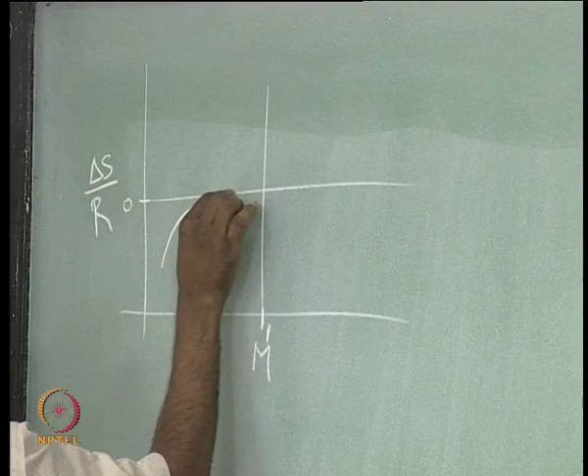We had a plot that was looking like this, that is, for Mach number less than 1 we were having delta S by R that was slightly negative or more negative depending on very low Mach numbers. For very high Mach numbers more than 1 we are going to have delta S positive.

Because of this reason we are going to say only M1 greater than 1 going to M2 less than 1, that is the only solution that is possible, which corresponds to my gas getting compressed across the shock. So we are saying only compression shock is possible, that is what we said.

And I was also very careful in telling you that when we say only compression shock is possible, I included the statement that it is for our air. Okay, if I want to think about it, I am currently going beyond the course curriculum, I am just telling you, if you are interested you can go read up more.

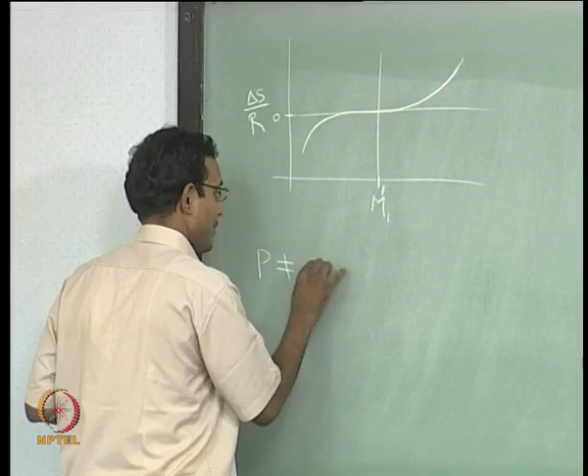If we are in a gas which does not obey P equal to rho RT, this is what we have been using all this time. We said P equal to rho RT for our gas, and so we got this behavior.

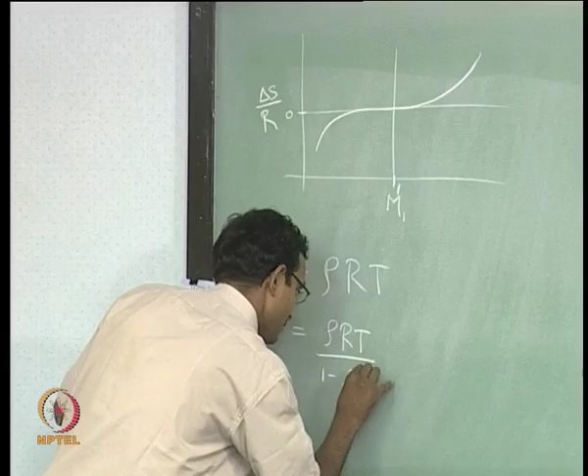Okay, if there is a gas where this is not true, say if I take the van der Waals equation, which is also known to people already, so I am using that. An equation of this form where A and B are two constants for that particular gas, for that range of pressures and temperatures which we are interested in. This is going to be the equation for such gases, where if I say A and B are 0, it becomes P equal to rho RT.

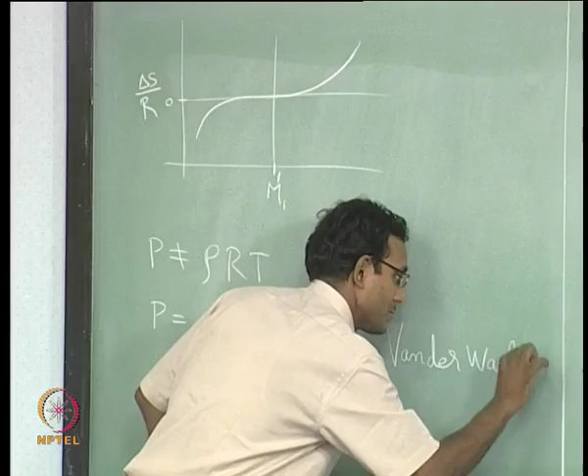Okay, if there is a gas that is obeying this, then we can call it either the van der Waals gas, or they gave a better name for it. People who studied this, based on them, get a name - it is called the BZT gas.

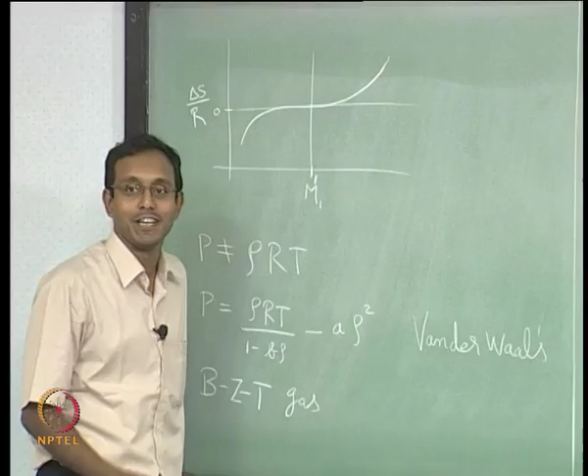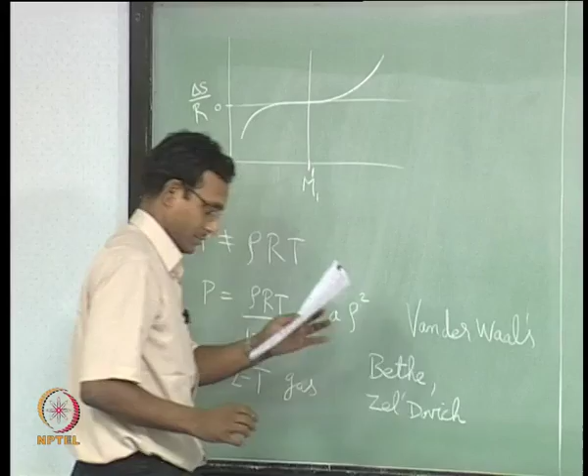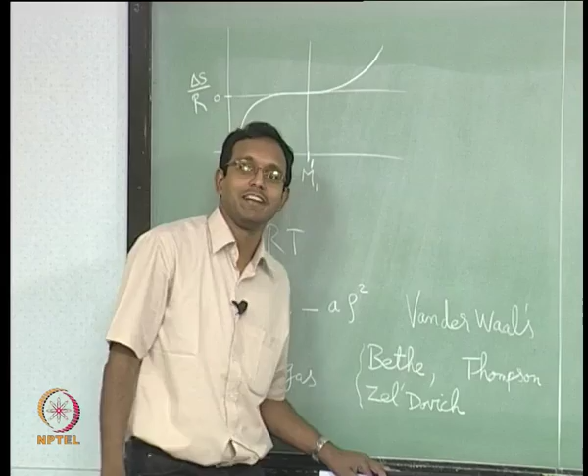BZT flows is what they call flows with this kind of gas. It is named for 3 different people: Bethe, Zeldovich - I think there is an apostrophe somewhere, yeah - and the third guy is Thompson. I will write Thompson here. These people worked in the 1940s, and he worked in the 60s and 70s, and they studied flows where expansion shocks are probably possible.

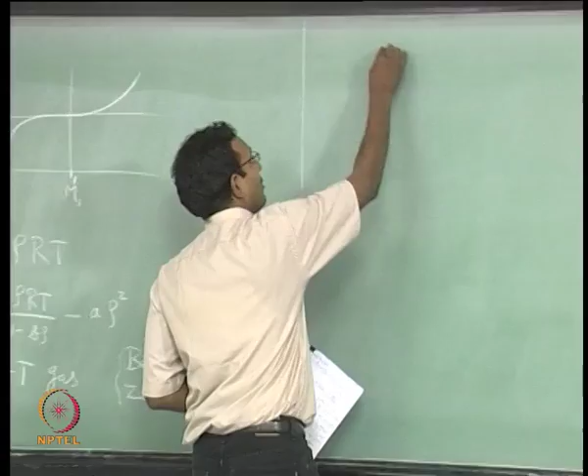Okay, the way it works is like this. I will go to a plot here of our state diagram. I am going to use P and V, and for our common gas it is going to look like this for T equal to constant line.

But if my pressures and temperatures are very low, where van der Waals forces are important, or my gas is such that it is important, the curve may look like this. If you are very close to, say, condensation of water vapor kind of ranges, things may change and do crazy things like this. I am not sure whether air with this little percentage of water vapor will affect it, I do not think it does.

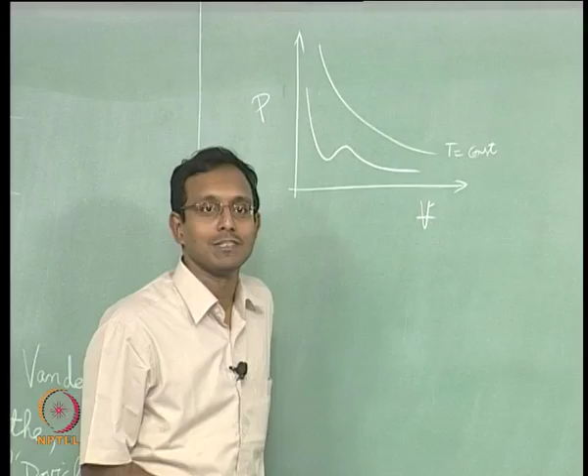But I may get such a curve for special gases. Typically the refrigerants which people use will have such characteristics. Anyways, in this range the gas may behave differently, because this is the opposite slope of dP by d rho I will get here compared to all the other places.

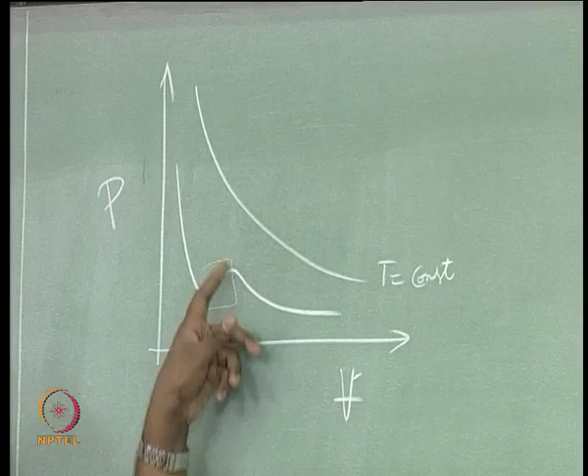This behavior is similar to this behavior, which is similar to this behavior, but in this small zone alone, if my temperature, pressure and volume, or pressure and temperature, are such that my gas is operating in this range, then I may have expansion shocks, and only compression waves are spreading away from each other. That is also possible.

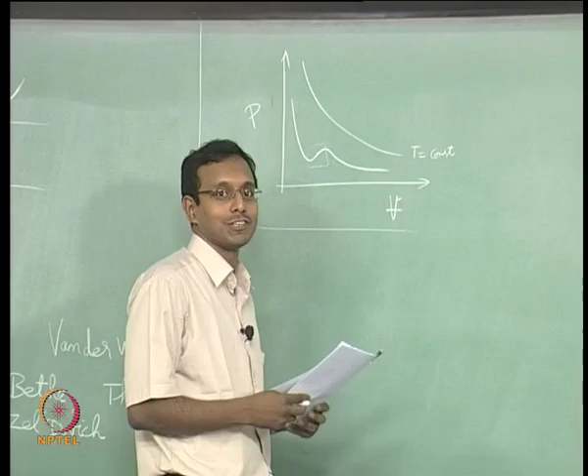This of course is not in the scope of this particular course. I am just telling you there are things out there which we do not deal with in our course. That is the only thing I will say about this, and then we will not talk about BZT flows anymore. It is there somewhere, where there are some gases where we can have expansion shocks and compression fans. Of course, you do not know what they are right now, so I should not be talking about it more.

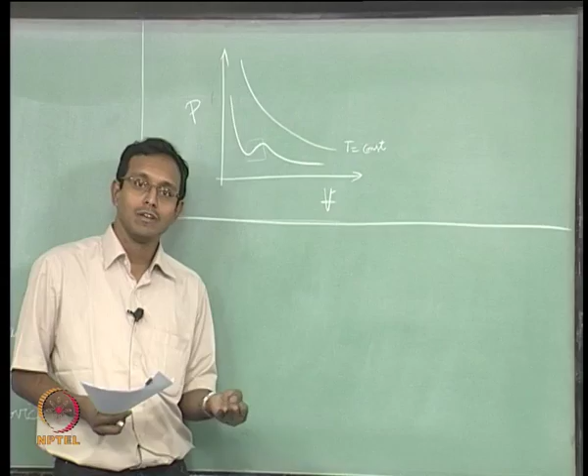Now we will go back and derive every ratio variable, which you have been deriving all this time in terms of M1 and M2, in just terms of M1 alone, just one variable. So we had this variable P2 by P1, which is 1 plus gamma M1 square by 1 plus gamma M2 square.

I had this. Now I will substitute the M2 square which we got last class. I wanted to write it separately, so I will put a line here and write it here: M2 square, we got it to be 2 plus gamma minus 1.

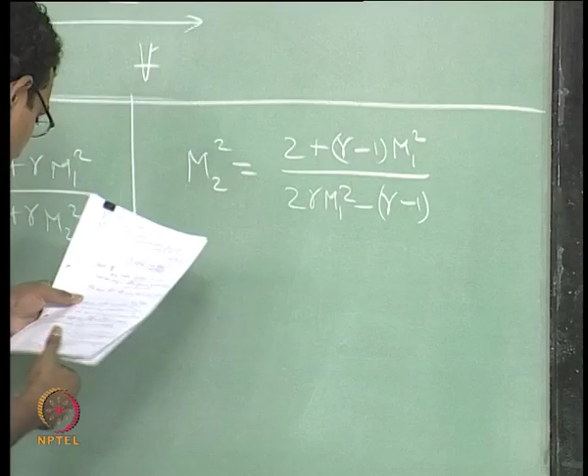M1 square divided by 2 gamma M1 square minus gamma minus 1. I had this expression. Now I want to substitute this M2 square inside here. So, P2 by P1 will now become 1 plus gamma M1 square divided by 1 plus gamma times that expression in here: 2 plus gamma minus 1 M1 square divided by 2 gamma M1 square minus gamma minus 1.

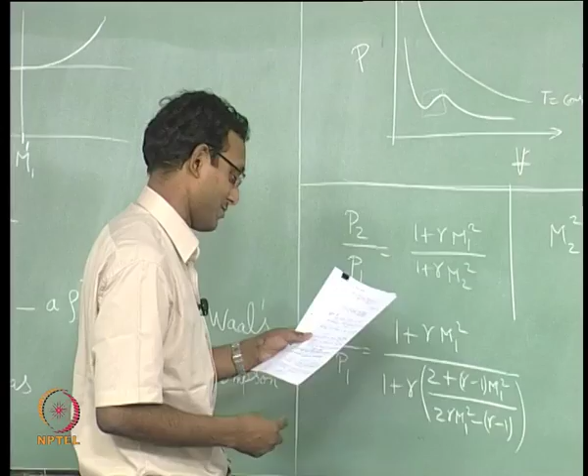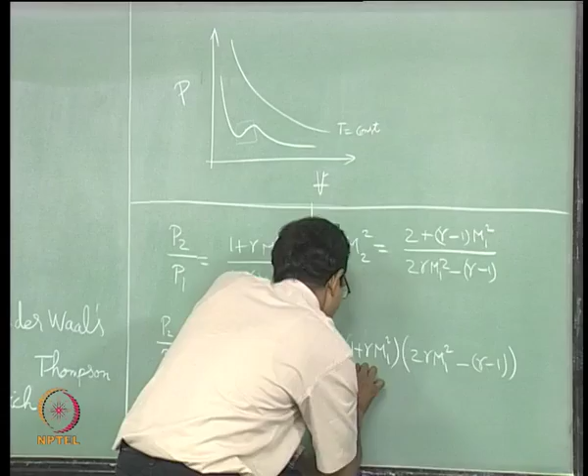Now I want to simplify this, it will come to a very simplified expression. I know that already, so I am going to simplify this. What I will do is take this denominator, multiply it with this 1, and take that whole term to the numerator up there, that is all I am going to do. Then it will become 1 plus gamma M1 square times 2 gamma M1 square minus gamma minus 1, divided by this multiplied with the 1.

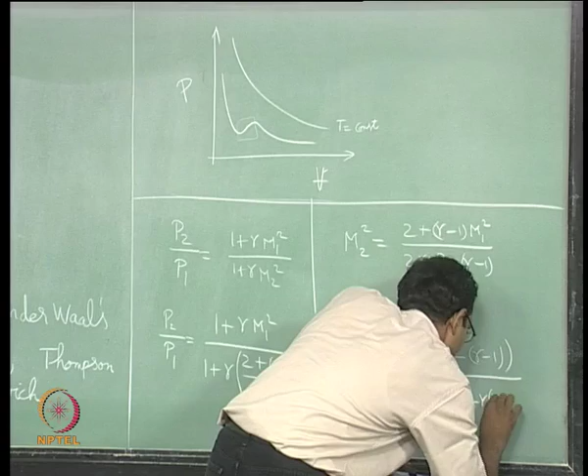So that is going to be 2 gamma M1 square minus gamma minus 1 plus 2 gamma plus gamma times gamma minus 1 M1 square. This is what I am getting here.

Now we want to simplify this expression further. I had this particular form. If I look at terms in here, if I group it in a particular form, it will come out nice, but let us go one step slower. I will just try and simplify it the way it is already.

What can I simplify here? Minus gamma plus 2 gamma, I can simplify that. I am going to link these two, okay, that can cancel each other. Of course there is a plus 1 here, nothing can be done with it currently. There is a gamma, nothing can be done.

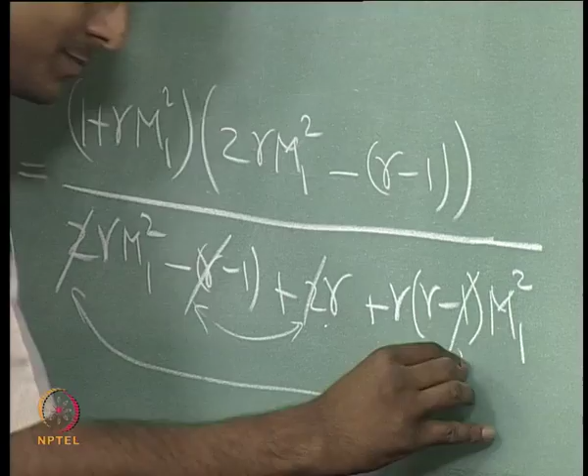2 gamma M1 square is there, and here there is minus gamma M1 square, so that can be simplified a little bit. I will remove that 2 with this minus 1, and I will again link these two. This is how I cancelled it. So the remaining terms just stay.

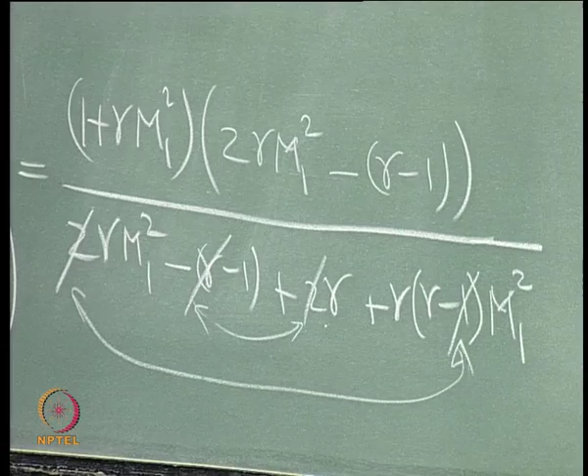There is a gamma M1 square, there is a gamma square M1 square, and then there is a gamma, and then there is a plus 1. Those are the 4 terms that I have in the denominator. I will write this, continue it here. I will keep the numerator as is, that is the same numerator.

Now in the denominator I will write it in a different form: gamma plus 1, plus gamma M1 square plus gamma square M1 square. This is what I have. I wrote it in a different order, that is all I have done.

Now if I look at these two terms, this will just be gamma plus 1 - there is a gamma here, no gamma here, that is the only way I look at it. Gamma M1 square can be common, this is what it comes out to be. So now I can write this whole expression as P2 by P1 equals... I get to this particular form.

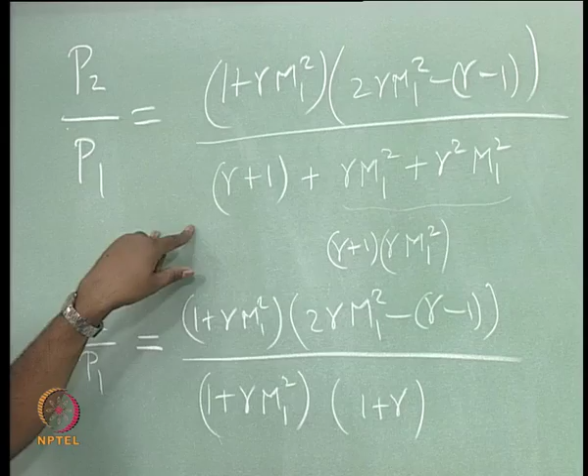So basically I have just pulled out a 1 plus gamma common here, then remaining will be 1 plus gamma M1 square. Now I am just directly going to cancel these two, whatever I have left is my final answer. I can leave it like this, or I can simplify it one more step, which is what I will do.

I am going to look at this term: 1 minus gamma plus 2 gamma M1 square. I want to make it 1 plus gamma on the top. So I will add and subtract gamma here - minus gamma will go with this already existing minus gamma, so it will become minus 2 gamma, and the remaining I will write plus gamma minus gamma. I have added these two terms here now, and I am going to group this and this together, that will give me a minus 2 gamma, and then the remaining term will be gamma plus 1.

So I will write it as 1 plus 2 gamma M1 square minus 2 gamma, divided by gamma plus 1. This is what I have, which can further be simplified as 1 plus 2 gamma by gamma plus 1 times M1 square minus 1. That is your final result, it is extremely simple. This is equal to P2 by P1. I will write it here again.

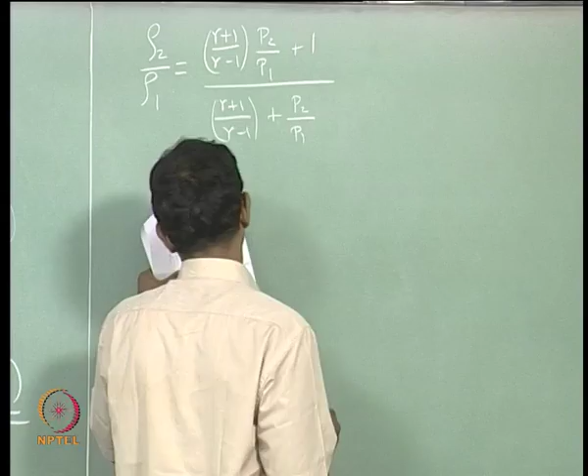Okay, we are going to start with what we have derived already. We have derived this long back, that is 3 classes before, I believe. It will just come out to be this form. Hopefully you remember that we derived this long back, when we started with normal shock, the very first class of normal shocks.

Now I want to substitute that P2 by P1 which we just derived in here, okay, and it will become P2 by P1. I do not want to write it as 1 plus 2 gamma m1 square. So I will write it as gamma plus 1 divided by gamma plus 1.

Okay, this way I can cancel the gamma plus 1, that is why I wrote this way. And the other one will be gamma plus 1 by gamma minus 1 plus 1 plus 2 gamma by gamma plus 1, m1 square minus 1.

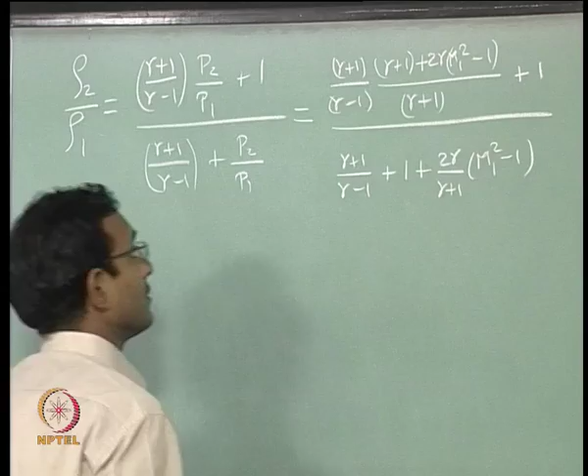Here I am retaining the original form which we had, P2 by P1 we derived just now. In the numerator I have multiplied this gamma plus 1 in there and put a common denominator gamma plus 1. That is what I have. I can cancel this gamma plus 1 directly there.

So I am going to have a slightly different expression which I have to rearrange eventually. So I will start pulling out gamma plus 1 by gamma minus 1, okay, that is one term, plus 2 gamma m1 square by gamma minus 1, minus 2 gamma by gamma minus 1, and then plus 1 is there, I will just keep it like that currently.

Divided by, now I have to rearrange this whole group of terms. So I will write it as currently gamma plus 1 by gamma minus 1 remains the same, plus I will pull out this minus 1 with 2 gamma by gamma plus 1 along with this 1. So it will become 1 plus gamma minus 2 gamma divided by gamma plus 1, plus 2 gamma m1 square by gamma plus 1. It is all just algebra, I am just rewriting things in one way or the other.

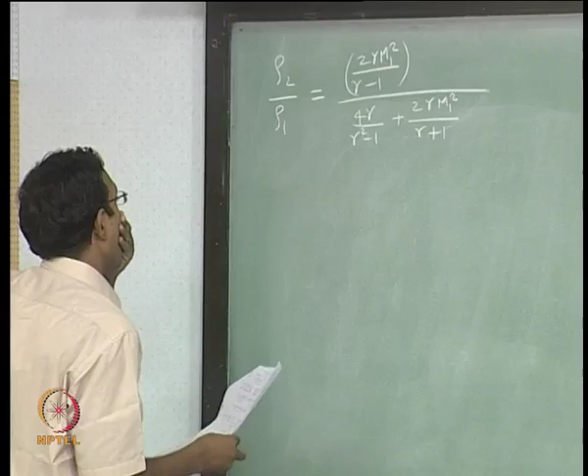Now, I will take this gamma minus 1 to the denominator and multiply it throughout, that is the next step. If I do that, when I multiply that gamma minus 1 with this term, gamma minus 1 into gamma plus 1 is what gave this. So, it will become gamma plus 1 in the denominator here, we will write it one by one.

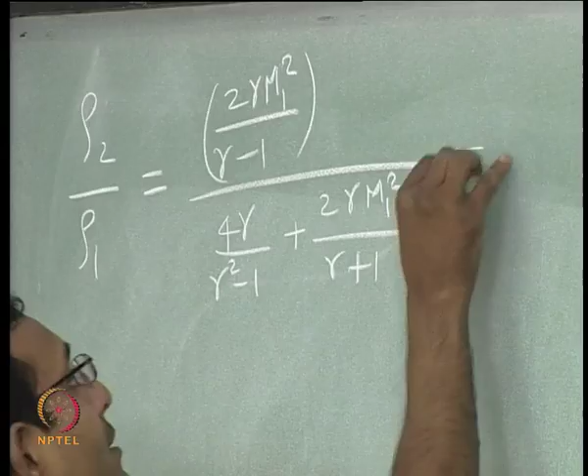So, it is going to be 2 gamma m1 square divided by 4 gamma by gamma plus 1 plus 2 gamma into gamma minus 1, m1 square by gamma plus 1. This is what I have.

Now, I can take this common denominator gamma plus 1 and put it up there. So, I will rewrite it as 2 gamma into gamma plus 1 m1 square divided by, I am having 4 gamma plus, actually I will just take out the 2 gamma first, so that I can cancel it with the numerator. 2 gamma into 2 plus gamma minus 1 m1 square, we will write it like this. This is what I have.

If I write it up to this point, now I can cancel this 2 gamma with this 2 gamma, and I do not think I can simplify this anymore. So, that is my final expression. I will write rho 2 by rho 1 is equal to gamma plus 1 m1 square divided by 2 plus gamma minus 1 m1 square.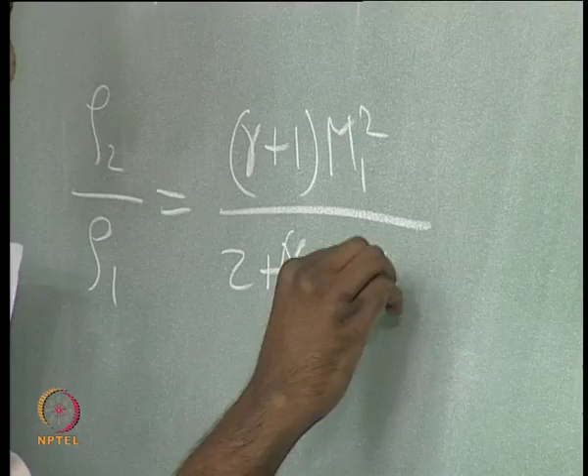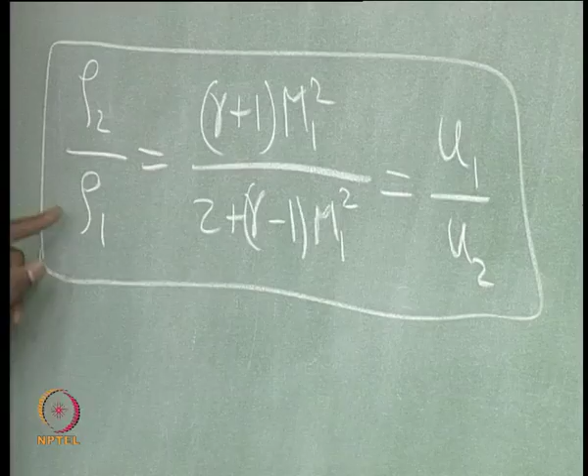It so happens that this is also equal to u1 by u2. Why? From the mass equation. So, this is another set of relations we have. Given m1, I can find rho 2 by rho 1, I can find u1 by u2. I already wrote an expression some time back for the third board, p2 by p1 in terms of m1 square, that is also given. So, the next thing left is t2 by t1.

I tried deriving t2 by t1 in any simple form, but it is very complex. So, we will just keep the simplest form. M1 square on the numerator. And this is the only form I will keep. Where is this coming from? I am going to say T naught 2 equal to T naught 1, and I am using the energy equation.

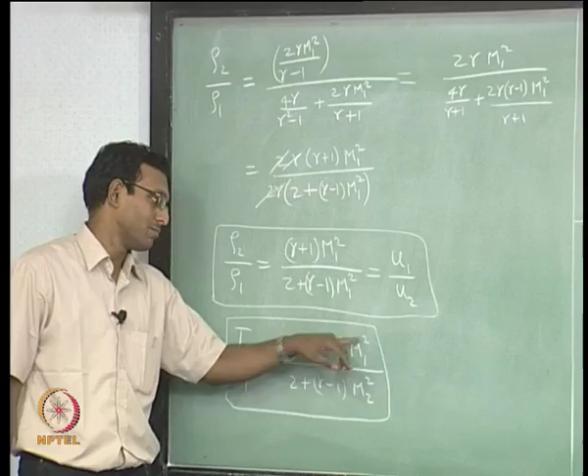Basically, T naught 2 by T2 is 1 plus gamma minus 1 by 2 m2 square. Similarly, T naught 1 by T1 will be 1 plus gamma minus 1 by 2 m1 square, and I have just rearranged the 2 such that it looks like this. This is another expression.

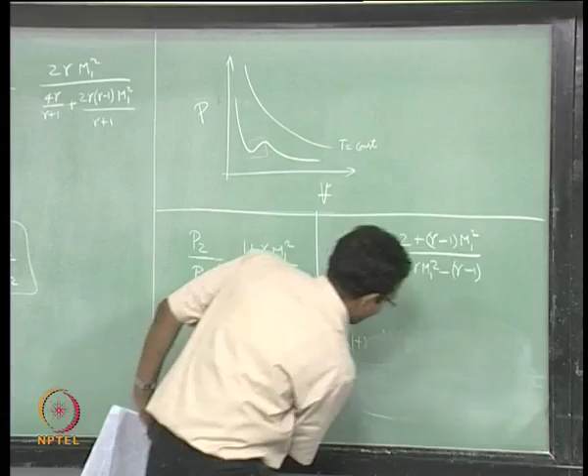So, now after this whole set of expressions, I just want to have in your notebook one page which will have all the formulae together for normal shocks, like we did for isentropic relations. We want to have one page just with all the possible relations for normal shocks.

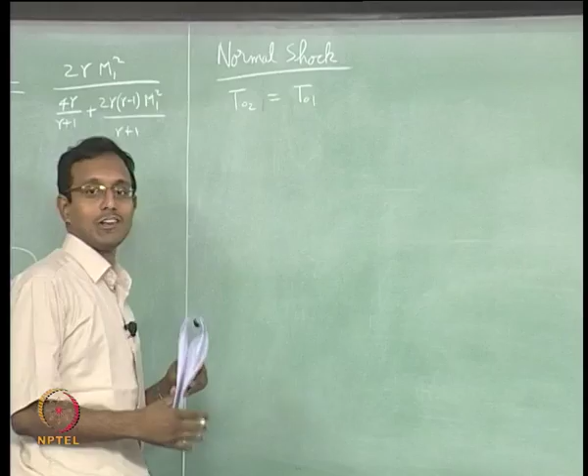So, first thing I can directly say T naught 2 equal to T naught 1. We proved this long back, we will just keep it that way. Next main thing, I will divide the board somewhere here, because I want to write some parallel set of relations there.

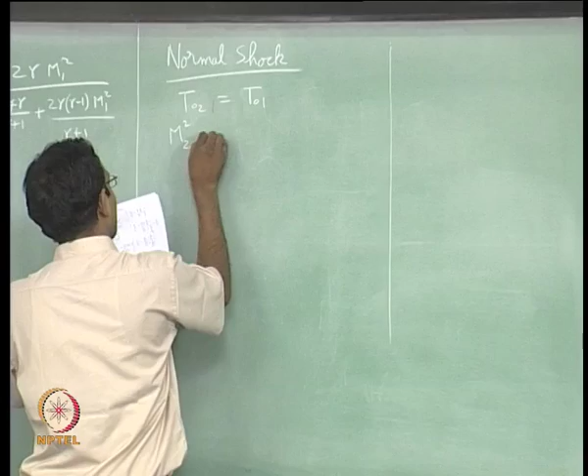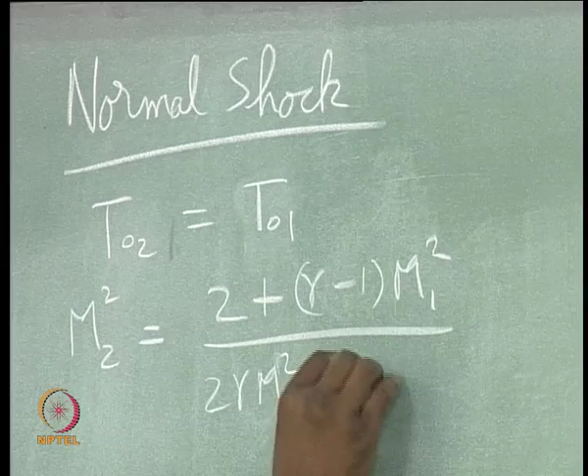M2 square, we derived this towards the end of last class, and we used this extensively today. 2 gamma m1 square minus gamma minus 1, that is the next relation, and then we just derived a whole set of relations. I will write the whole set of them here, p2 by p1.

One nice form for p2 by p1 is 1 plus gamma m1 square by 1 plus gamma m2 square. This is a nice form, so I will always want to keep track of this. Another form which we derived today is this.

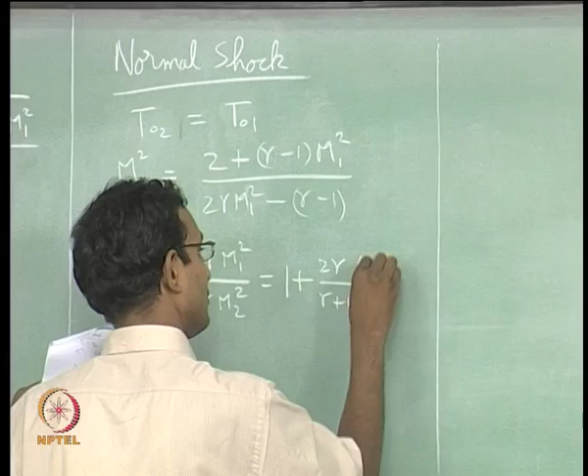Now, this can also be rearranged in one more form, which we actually did today. During one of the derivations, it came out to be this.

I am writing this also because this numerator is shared by this thing as a denominator. That is the only reason why I will keep this. This denominator is same as this numerator. That is the only reason I will like this form also. In case sometimes I have m2 square multiplying p2 by p1 in any relation, I may need to use this kind of form, that is all. Ideally you can use any form, it will automatically rearrange itself, that is the beauty of math.

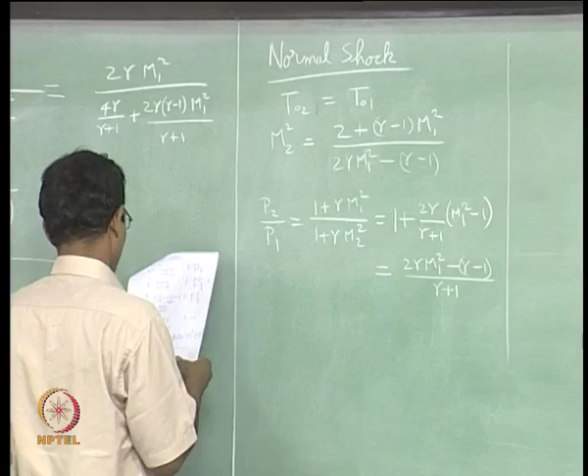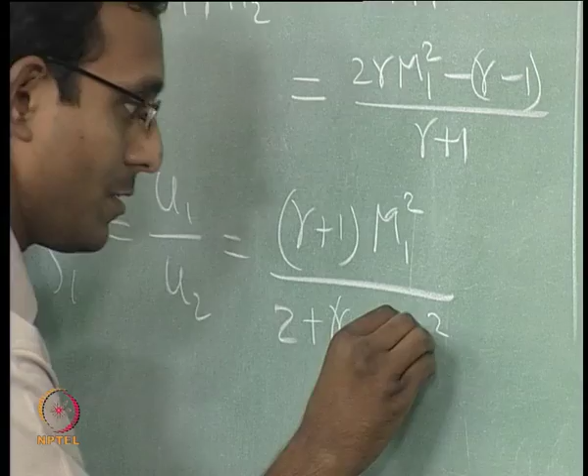Anyways, now the next thing is rho 2 by rho 1, we know that it is equal to u1 by u2, which we just now derived. So, I will anyway write the expression here for completeness sake, gamma plus 1 m1 square divided by 2 plus gamma minus 1 m1 square. And we said that there is no special relation for T2 by T1, I will write that expression also here.

These are the set of relations we have. One more I have not written here, I will come back to it, but before that I will also write the other set of parallel relations, one ratio in terms of other.

It is supposed to be rho 2 by rho 1. That is one relation, rho 2 by rho 1 in terms of P 2 by P 1. Of course, it can be obtained by rearranging the top one. Of course, this is equal to u 1 by u 2.

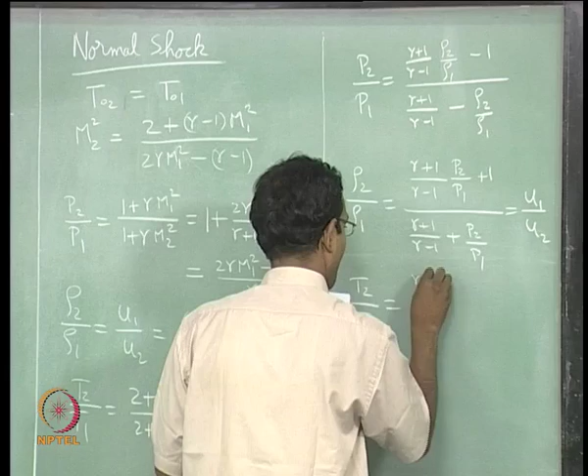T 2 by T 1 in terms of P 2 by P 1 can be written in a different form. I do not think I derived this particular relation, but it is not very difficult to get. If I take this rho 2 by rho 1 and then I take this P 2 by P 1, I am going to say T 2 is P 2 by rho 2, T 1 is P 1 by rho 1. So, if I use this divided by this, actually no, I do not need to do that, I want everything in terms of P 2 by P 1.

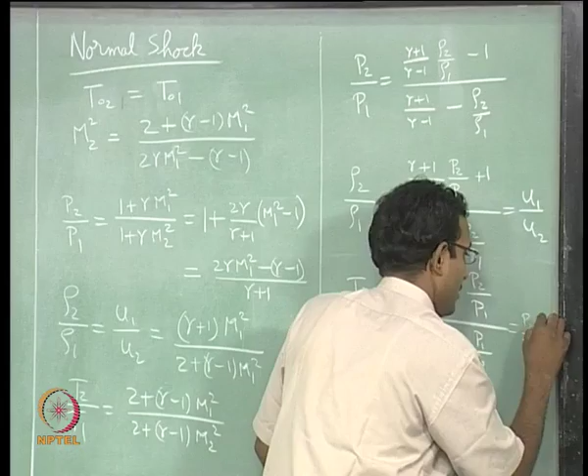So, I am going to take this, multiply this with P 1 by P 2, that will give me. I want the reciprocal of this multiplied by P 2 by P 1, that will give you this relation. You can go write it, it is not very difficult, I will just write that expression here, P 2 by P 1 times rho 1 by rho 2. I am using this rho 1 by rho 2 from here, reciprocal of this multiplied by P 2 by P 1, then I will get to this form. This is another form which you can get.

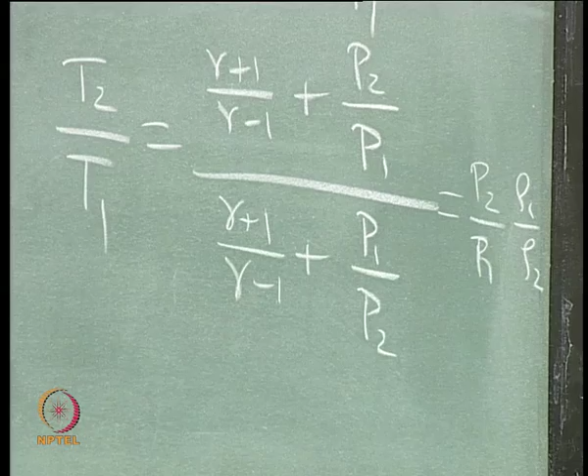Now, other than this, I want to write one more expression here. We have not yet derived it, but for completeness sake I will put it here and then I will derive it now. One simple thing is P 02 by P 01. This is not very difficult to derive, I will just write it here. We use a particular technique which is very common in gas dynamics.

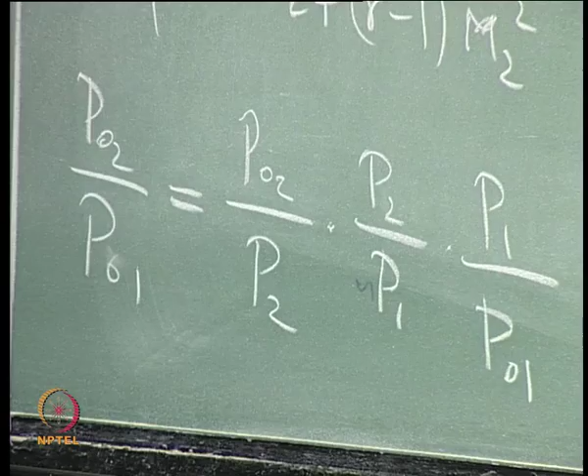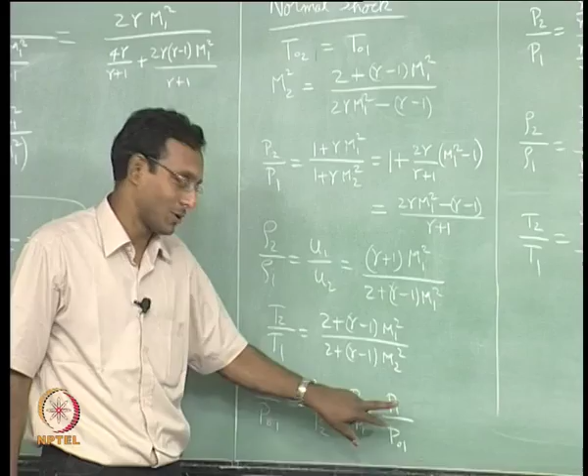We have expanded this particular ratio into a product of 3 ratios. This is a cyclic product of ratios, that is what you have done. If you look at it, I have expression for this in terms of 1 plus gamma minus 1 by 2 m square to the power gamma by gamma minus 1, similar expression for this, just the reciprocal of that, and then P 2 by P 1 we have a relation here already. So, I can get this P 02 by P 01 already. Of course, I can write that expression, but you know the expression, I do not need to write it separately.

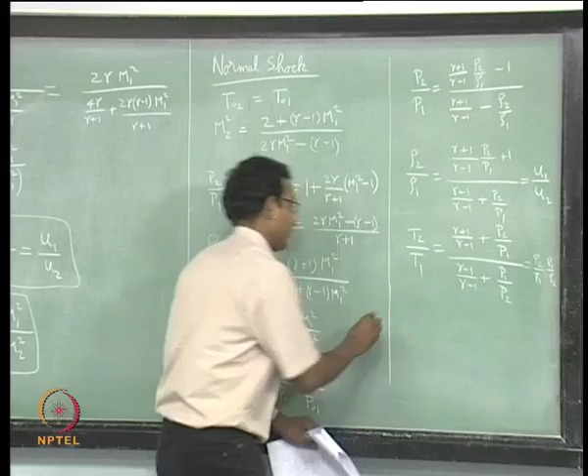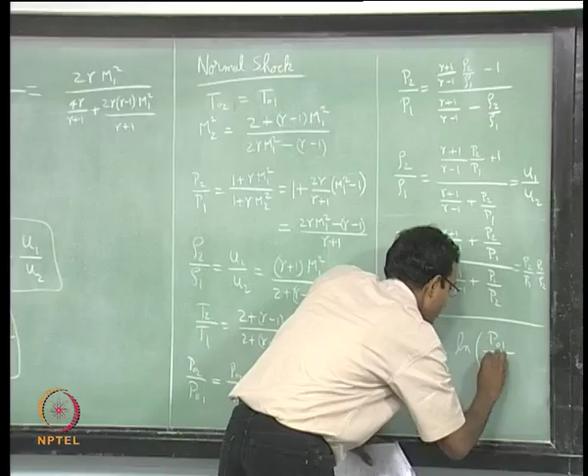One more remaining expression which belongs in this column I will write here is delta S by R, the entropy change is equal to log of P 01 by P 02, where this delta S is actually S2 minus S1. It is actually S2 minus S1 is coming out to be log of P 01 by P 02.

Now, this is the only thing which I have not derived, we will derive it now. Not very difficult to derive, it is easy enough. I just have to start with the second class of our thermodynamics review, delta S

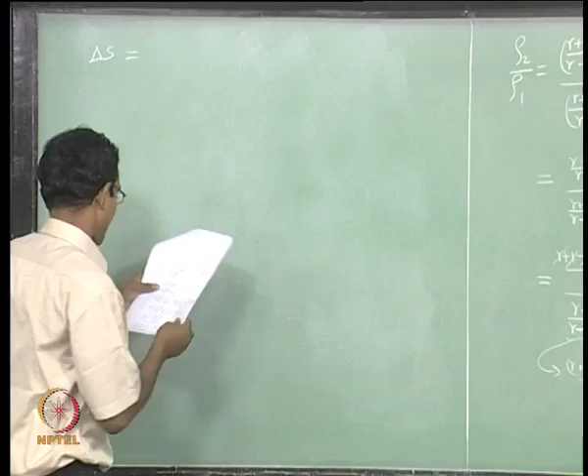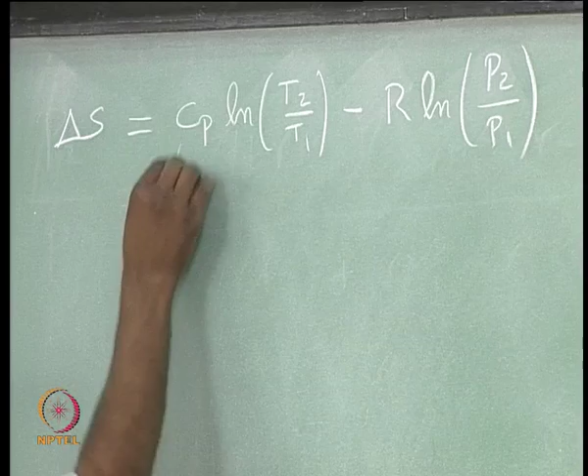is Cp log T2 by T1 minus R log P2 by P1. We had this form already, and we are going to say calorically perfect gas kind of assumptions. This Cp can be written as gamma R by gamma minus 1.

Once I have this, I can pull out an R and put it below delta S. So, I will rewrite it as delta S by R equal to log of gamma by gamma minus 1 is in front of log. I can take it inside the log by putting power of T2 by T1. So, I will make it T2 by T1 to the power gamma by gamma minus 1 minus another log is there. So, it will become reciprocal of P2 by P1, so it will be P1 by P2. I have made it into one log, that is all I have done.

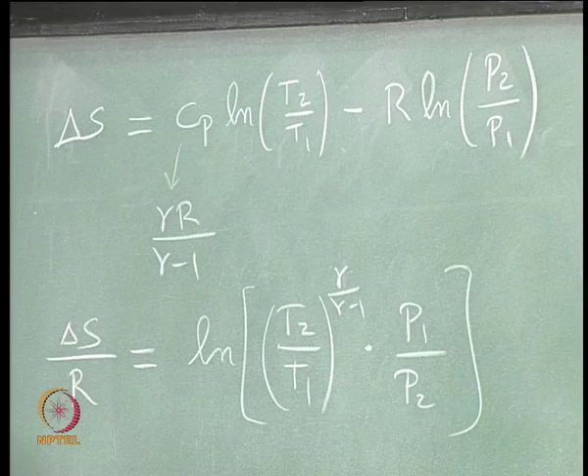Now, I have expressions for T2 by T1 and P1 by P2. We just have to put the appropriate expressions, and it will be comfortable enough. And if you use the wrong expression, I will get a very complicated relation. You have to use the correct one so that it looks simple enough. So, I want to make everything in terms of stagnation pressures and stagnation temperatures, because I know something about the stagnation temperatures, they are equal.

So, I will write this T2 by T1 as T01 by T1 divided by T02 by T2 multiplied by T02 by T01.

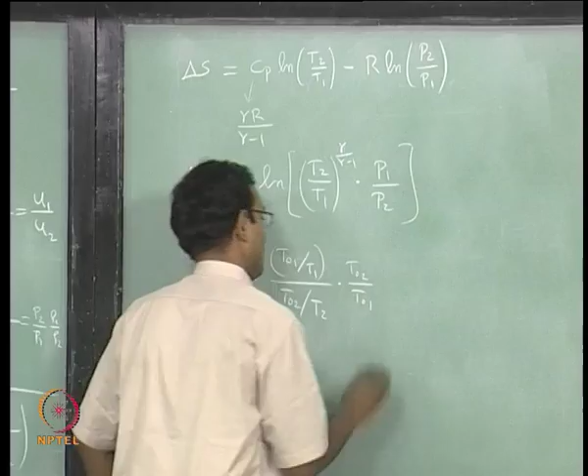This is correct. Okay.

Now what I want to do is write an expression for this in terms of M1, and a function expression for this in terms of M2. That will come out to be, and I know this is equal to 1, since T02 equal to T01 across a normal shock, so I can just use this. Now I will look at the remaining terms alone, that will be 1 plus gamma minus 1 by 2 M1 square divided by 1 plus gamma minus 1 by 2 M2 square.

I have this. Now I have to look at P1 by P2. This can be written in terms of stagnation pressures again, that is going to become P02 by P2 divided by P01 by P1, multiplied by P01 by P02. I will write it like this.

Currently we will keep P01 by P02 as is, we know it is not equal to 1, it is something other than 1, we will keep it, but the other two expressions I can write in terms of 1 plus gamma minus 1 by 2 M square. So P01 by P02 times 1 plus gamma minus 1 by 2 M2 square to the power gamma by gamma minus 1, divided by 1 plus gamma minus 1 by 2 M1 square, again to the power gamma by gamma minus 1.

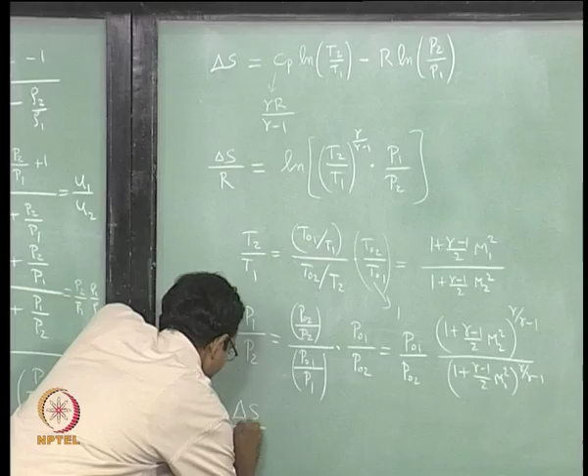So finally I will be left with just P01 by P02. That is how I am deriving this. Delta S by R will finally just come down to log of P01 by P02. This is S2 minus S1 equal to log of P01 by P02, that is what you will get.

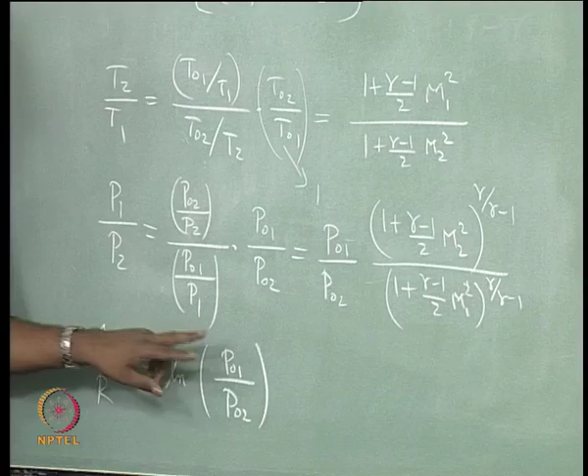And of course, you should know from here that P02 is always less than P01, because we want entropy to be increasing. Delta S has to be positive, which means this log has to be positive, which will happen only if the ratio is more than 1. So I can tell that P02 is less than P01 directly.

So this is the derivation for the formula I gave you on the previous page's formula sheet. Now we have come to a point where we have to get more physical feel for this. So we will go and plot the thermodynamic process. I am looking at a TS diagram.

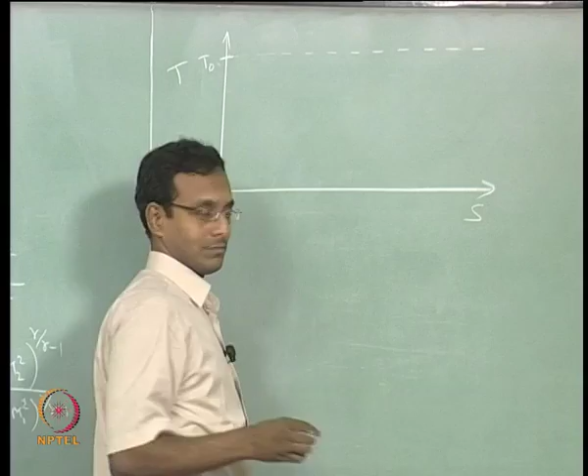TS diagram. So the first thing I will mark will be T0, because I know it is constant. T01 and T02 are both equal, so I just put T0. Now I will mark P01, that will be some curve. You know that constant pressure curves on a TS diagram are exponential curves, so it goes like this. I will put it as P01, that is pressure equal to P01 will be this curve.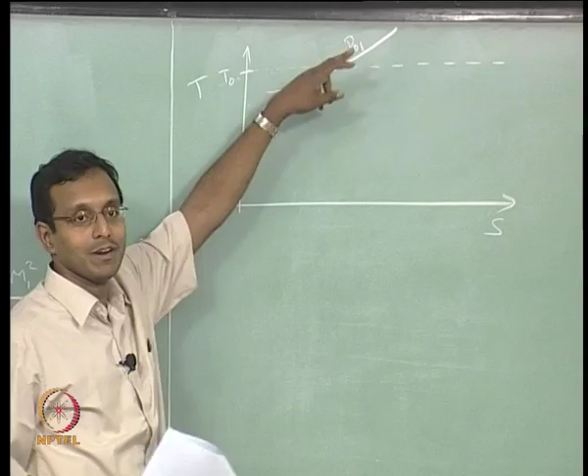Now I am saying that for this T0, T star is here, and my incoming flow is supersonic, which means my P1, T1 will be somewhere lower. This is my T1 line, and I know this is the stagnation condition, which means this is the entropy value. So my P1 curve must pass through this point, that will be another exponential curve going like this, this is my P1 curve. So my actual state on this diagram is P1, T1, which will be this point, that is my initial point, that is where I am.

From here I am going to a subsonic line, that is I am crossing this line and going above. So let us say this is my T2.

I am crossing my T star and going to some higher temperature. As I am doing that, I am also increasing entropy, so I will put an entropy line here.

This will be my new state, so I am going to put a P2 curve through that. This is my actual state T2, S2. I will call this S1, this is S2; T2, S2 will define my state using two thermodynamic variables, or I could use T2, P2 to define my state. So I am having these two: this is my state 1 and this is my state 2.

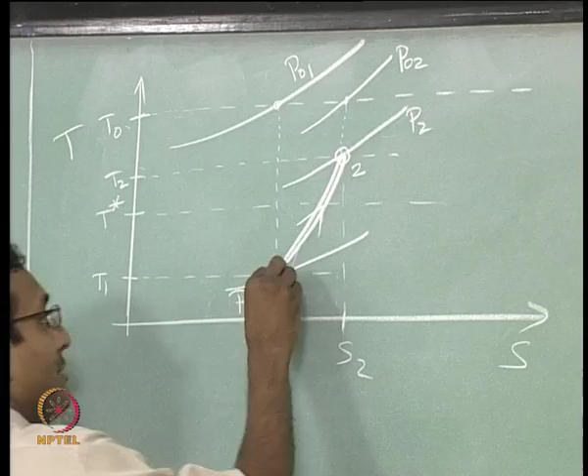I have drawn a curve like this, maybe somebody else will draw a curve like this - I do not want to disturb this picture, I will just take another 1 and 2. Both are valid in my opinion, because we know only the starting point and ending point, I do not know how it goes through this. Both are equivalent in my opinion.

So what we can say is the gas jumps from this state to this state within a thin layer, and we do not have details of what it is doing inside the thin layer. All we know is it is jumping from here to there. So ideally we should not worry about what path it takes - there is no path inside the shock, it is a very thin layer. That is the detail I have here.

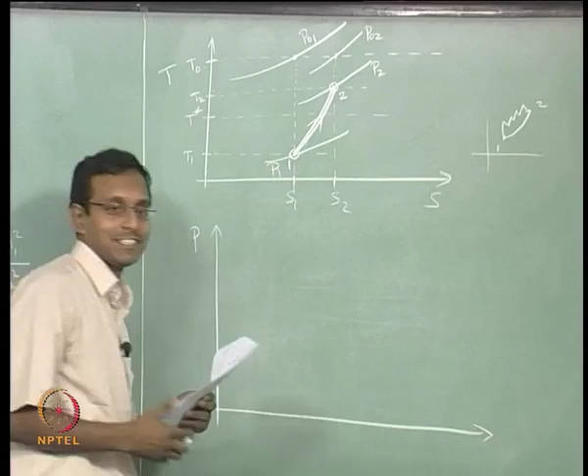Now we will go for the PV diagram. Of course, every time I draw a TS diagram, I will immediately go to the PV diagram - you have to get used to this. You should be able to handle the problem in both coordinate systems.

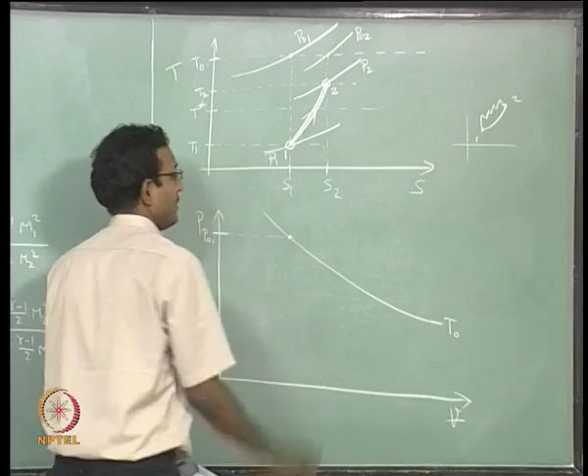Here I have to draw first a constant temperature line, my T0 line, which will be a hyperbola - it is going to look something like this, T0 equal to constant, that is the T0 line. Now I have to say this is my P01, I will pick a P01. Wherever this line meets my T01, that is my stagnation condition: 01 condition will be T01 and P01, wherever that meets is my stagnation condition.

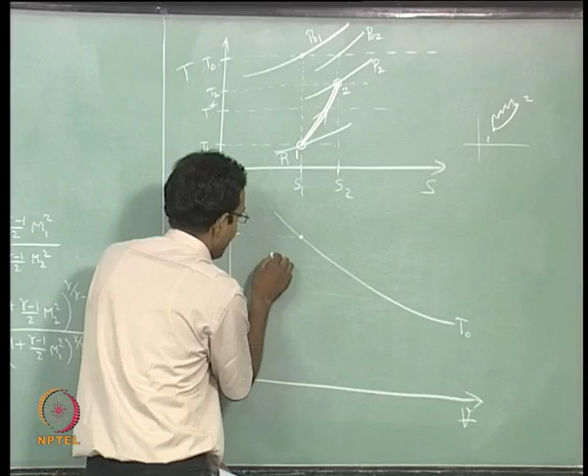Now from there I have to go to different temperatures. What did we do here? We went to T star. So I will draw a T star curve which will be a lesser temperature than that, another hyperbola - this is my T star line.

Actually what I want is a T1 line, it should be below this, that is all I want. So I will draw a T1 line. Once I have drawn it, I need to extend this T1 curve all the way up to that. This is my T1 curve.

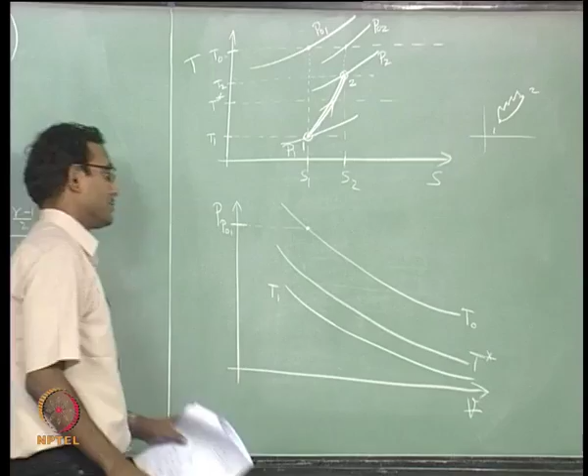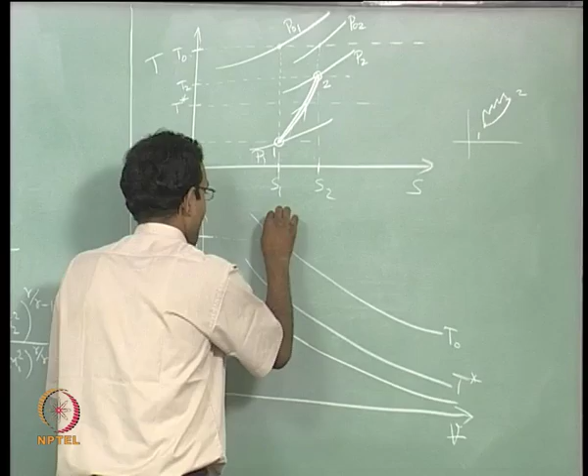I know the stagnation condition, I have to go to the static condition. How should I go? I have to go along an isentropic curve. So I will draw an isentropic curve through this stagnation condition point, which will be a steeper curve - that is what is interesting. It will be a curve like this. Of course it will never cross zero, it is going to turn and become something like that. Now this is my state 1.

And if I draw a line along this, that is my P1 line. And of course if I want density 1, it will be the reciprocal of this particular V1, that is all.

Now this is my state 1, and I am saying it has the same T naught, but is going to have a lower P naught after it crosses. So I will mark a P naught 2 - same T naught and P naught 2 will mean this is the new stagnation condition, P naught 2, T naught 2, that is this point.

Now I know my final state T2 must be sitting somewhere along this isentropic line. This is my S1, this is my S2 line, I have to draw an S2 line - it will be a line like this.

I have to tell that my solution is somewhere between T naught and T star. So let us pick this line as my T2 - I have drawn it wrong, it should be in between these other two curves, more steep, something like this, that is my T2 curve. So I am getting a P2 line.

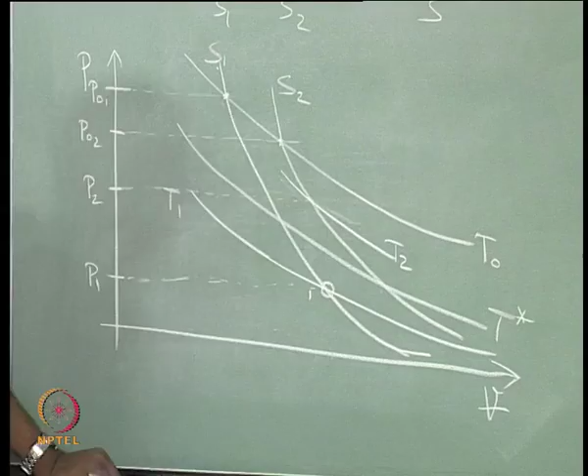I am just checking whether I have drawn the curves correctly, it is close enough to say that it is okay. I have to make sure that it is compression, right. I should not pick a crazy delta P that it will look like expansion, that is all. So currently I have made sure that it is close.

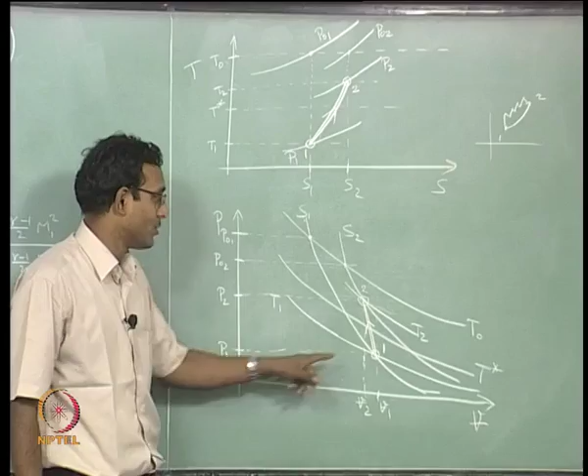This is my state 1, and V2 is less than V1, which says I am going through a compression process, everything is matching. So now my process is something from 1 to 2, again I will draw a double line because there are so many curves. This is my jump across the shock, going from point 1 to point 2. We do not know how it goes, all we know is this is the starting point, this is the ending point, the intermediate path we do not know, we will leave it like that for now.

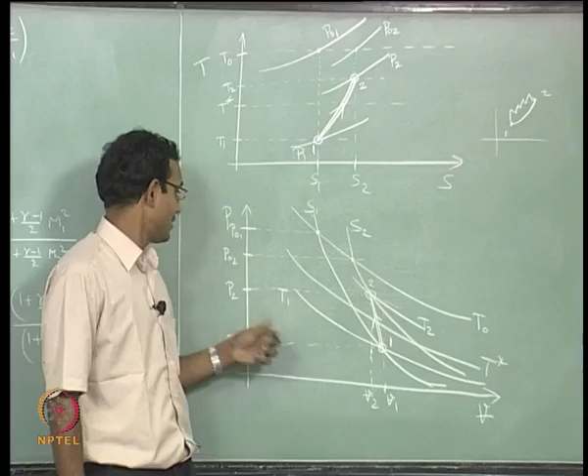So at any time you should know that in a PV diagram my curve is going to go up and to the left for a shock, and in a TS diagram it is going to go up and to the right. It is easy to tell, shock heats the gas and also increases entropy, that tells you it is going up and to the right. In a PV diagram it is going to compress the gas and increase pressure, volume decreases, pressure increases, so it goes to the left, top and left, easy way to think about this.

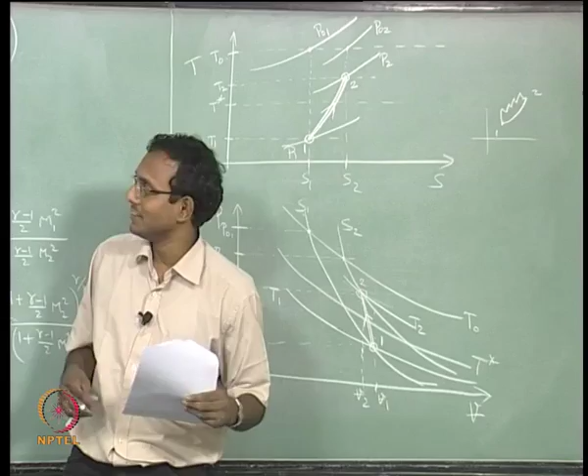Now we want to do some analysis with the expressions we got today. Maybe there is just enough time to show some plots, so I will show you the plots, then we will do the analysis next time. So I will go to these plots here.

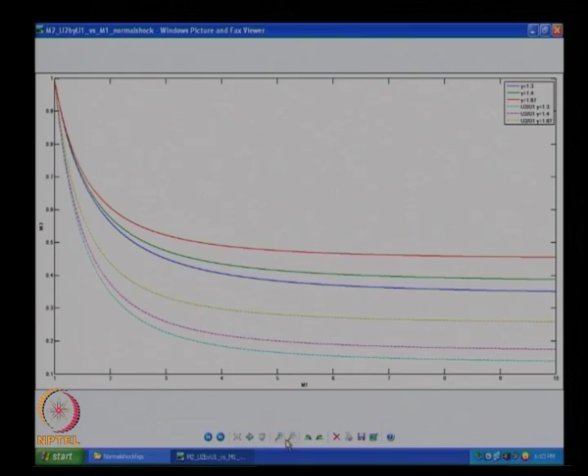We looked at effects only based on Mach number as of now. Now the only thing left to do in this set of things is go and look at M2, what is this asymptote value for a given gamma value. For a given gamma, it is one particular asymptotic value. We can look at that and we can show that P2 by P1 or T2 by T1 will not go to any asymptote. Those are the things we can show here.

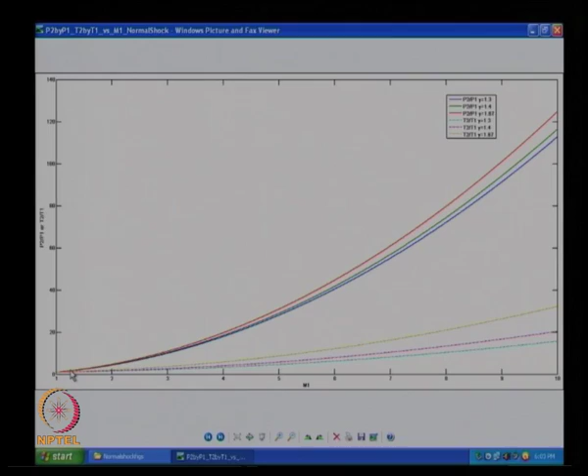And what happens to this particular condition when M equal to 1? We will look at that also. What should be the value for P2 by P1 when M equal to 1? It just becomes 1. We should be able to get this from our relations. We will look at all that next time.